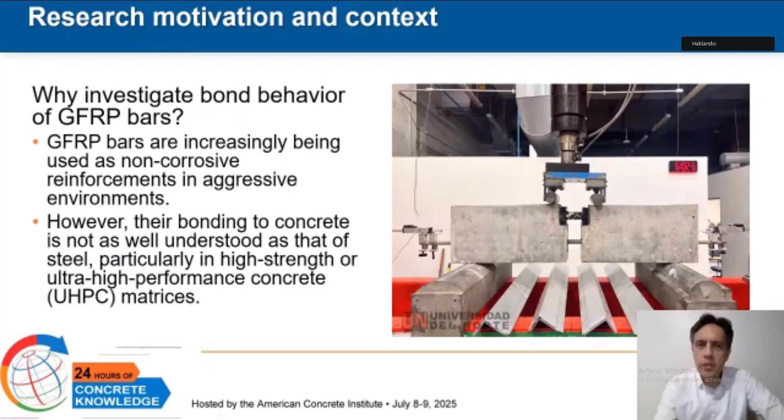The use of GFRP bars has expanded rapidly, especially in marine environments, on bridges, and at desalination facilities due to their excellent corrosion resistance. However, their interaction with concrete, especially the development of bond strength, remains unclear, particularly with high-strength concrete.

Most existing tests, such as pull-out methods, fail to capture the actual stress present in flexural members. Additionally, current codes offer little guidance on using advanced concrete such as ultra-high performance concrete, UHPC. To address these gaps, we employ the RILEM RC5 beam test method, adapted specifically for GFRP bars. This method offers a more accurate representation of structural behavior under service conditions. This methodological refinement paves the way for evaluating the influence of compressive strength on bond and its implications for future design criteria.

This side-by-side comparison shows that although steel bars are ductile and widely accepted in code-based design, they suffer from corrosion and conductivity issues, especially in tough environments. GFRP bars, on the other hand, offer outstanding corrosion resistance and are non-conductive, making them ideal for specific applications. However, their low stiffness and brittle behavior introduce unique challenges. These differences make bond performance crucial, particularly when designing with high-strength or ultra-high performance concretes.

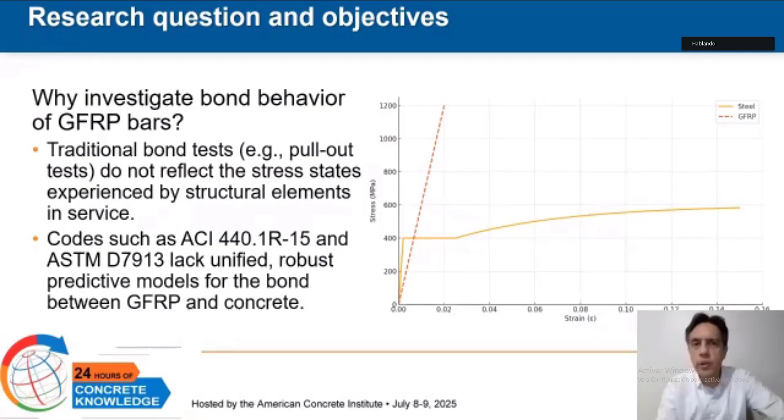This figure compares the typical stress-strain behavior of steel and GFRP reinforcements. The GFRP curve on the right exhibits a linear elastic response up to failure with no yielding, resulting in a brittle rupture around 1200 megapascals. This behavior is governed by its lower modulus of elasticity of about 60 gigapascals and the absence of plastic deformation. In contrast, the steel curve shows a well-defined yield plateau beginning at a strain of 0.002, followed by strain hardening beyond 0.025. This ductile behavior allows for energy dissipation and is central to traditional design approaches.

We then tested each of these mixtures using the RILEM RC5 hinged beam method, which provides a more realistic simulation of service conditions than traditional pull-out tests. We analyzed bond-slip curves to evaluate maximum bond strength, stiffness, and post-peak behavior.

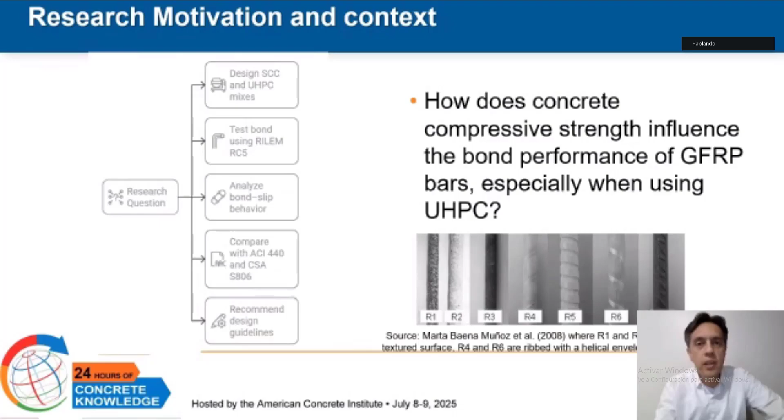Then we compared these results to the code-based predictions from ACI 440 and CSA S806 to evaluate the accuracy and conservatism of current design models. Finally, we translated our findings into practical design recommendations useful for structural applications involving GFRP reinforcement in high-performance concretes.

The bond between GFRP bars and concrete is traditionally tested using the ASTM D7913 pull-out method. Although this setup is standardized and widely used, it creates stress conditions that differ from those in real structural elements, typically applying a uniform axial pull to the bar and failing to account for flexural behavior, cracking patterns, or confinement effects.

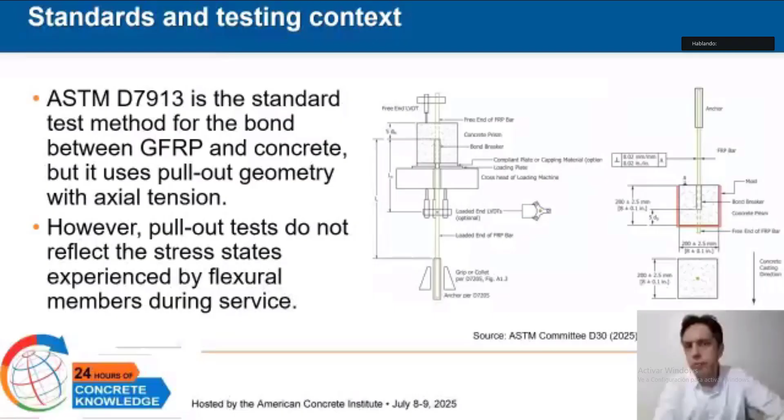To address these limitations, our study adopted the Rilem RC5 hinged beam test method, which was originally developed for steel rebars but was adapted for GFRP in this study. This configuration induces a pure bending moment, producing a bond-slip response under more realistic conditions.

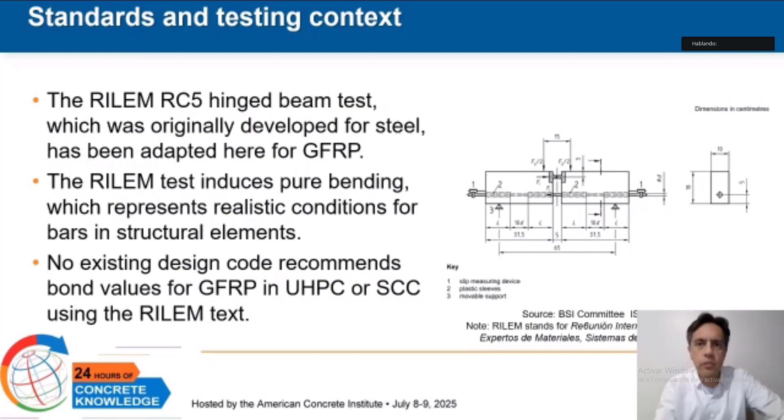This diagram illustrates the configuration of the Rilem RC5 hinged beam test, which was adopted for our study to evaluate the bond behavior between GFRP bars and concrete. The specimen is a 65-centimeter-long prismatic beam supported at both ends by movable supports that allow rotation and simulate flexural action.

The GFRP bar is embedded along the beam's axis. However, the central region, spanning over 10 times the bar's diameter on each side, is intentionally debonded using plastic sleeves. This localizes bond activation in the central bonded zone. A central point load, Fa, is applied to create a pure bending moment at midspan, generating tension in the bar and bond stresses that more closely resemble real structural conditions than pull-out tests do.

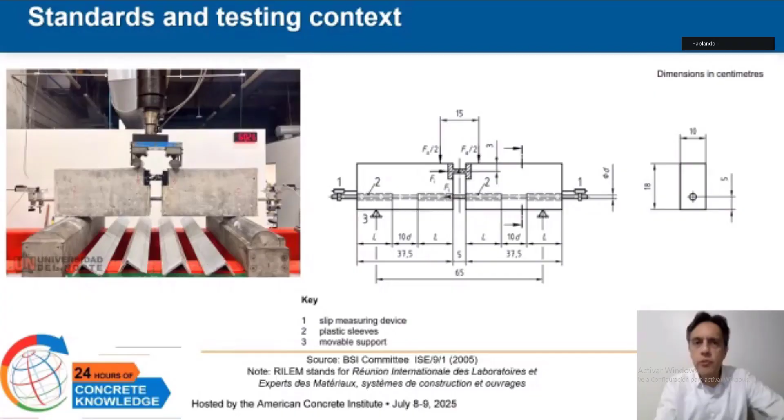Slip is measured at the bar ends using LVDTs, and failure is typically governed by bond strength or pull-out from the bonded region. This configuration enables us to capture the bond-slip relationship, peak bond stress, and post-peak behavior more accurately.

The experimental program included 4 concrete mixtures covering a wide range of strengths, from conventional self-consolidating concrete (SCC) with a compressive strength of 20 megapascals to ultra-high performance concrete with a compressive strength exceeding 120 megapascals. The goal was to isolate the effect of concrete strength on the bond with GFRP bars while keeping all other parameters constant.

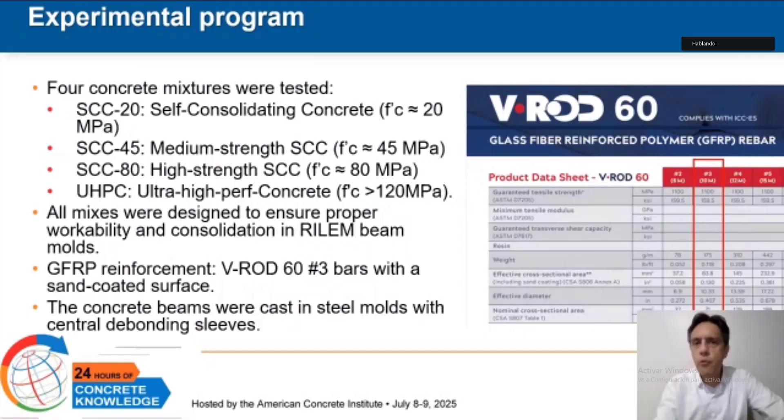We used sand-coated V-ROD 60 number 3 bars for the reinforcement, which are widely used in corrosive environments. All beams were cast using steel molds with plastic sleeves installed to define the bond region following the Rilem RC5 geometry. These carefully controlled conditions ensured consistency across specimens and reliable comparison of results.

This table summarizes the mix designs used in the experimental campaign. 3 self-consolidating concrete mixtures with increasing compressive strengths of approximately 20, 45, and 80 megapascals were produced through progressive reduction in the water-to-cement ratio and adjustments in fine aggregate content.

A 4th mix corresponds to ultra-high performance concrete and was designed with a water-to-binder ratio of 0.18, a high cementitious content, and the addition of silica fume, fly ash, and 2 types of steel fibers. Notably, the UHPC mix eliminates coarse aggregate, relying instead on particle packing and fiber reinforcement to ensure mechanical performance and matrix densification. All mixes were proportioned by mass per cubic meter to ensure proper casting in Rilem beam molds.

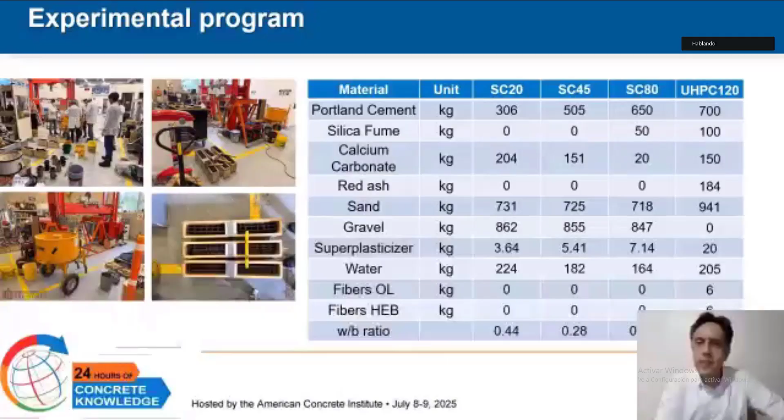These images illustrate important aspects of preparing specimens for bond tests. The first photo shows the wooden molds used to cast the Rilem RC5 beams. The GFRP bars are placed longitudinally with plastic sleeves in the central zone to create unbonded regions and ensure bond activation only within the designated embedment length.

The second image shows the steel reinforcement cage used to simulate confinement. It contains 6.4 and 8.5 mm diameter rebars placed strategically to replicate the presence of transverse reinforcement and the shear effects observed in real structural elements.

The third image displays the expanded polystyrene inserts used to form the central hinge. This feature ensures a clean fracture plane and consistent bending behavior during testing. All specimens follow this setup to maintain experimental consistency and simulate service-like stress conditions.

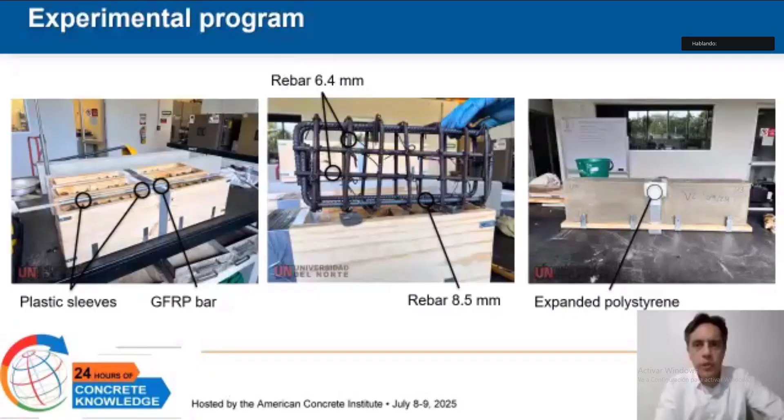This slide illustrates the control mixing sequence for both SCC and UHPC mixtures. First, we introduce all cementitious materials, including cement, silica fume, and mineral additives. These materials were dry mixed to ensure homogeneity. Next, we gradually added the mixing water and the high-range water reducing admixture. This stage starts hydration and enhances the dispersion of fine particles.

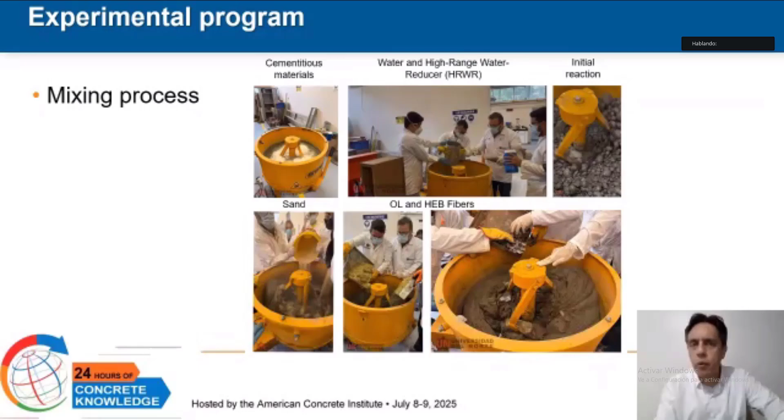As shown in the third image, an initial reaction is triggered at this stage, resulting in visible clumping due to the interaction between the silica fume and the water. Then we added the sand in increments to ensure uniform distribution without overloading the mixer. Finally, we slowly incorporated the steel fibers into the fresh matrix to minimize agglomeration and maintain workability. This standardized procedure was essential for achieving consistent rheology and strength across all batches, particularly for the ultra-high performance mix.

This slide summarizes the casting and curing process for the RILEM beams and cylindrical specimens used to evaluate compressive strength. The first sequence shows the casting phase in which fresh concrete is placed into the beam molds and standard cylinders. Proper vibration and surface finishing were used to eliminate voids and achieve uniform consolidation.

The second sequence shows the curing process. All specimens were stored under controlled humidity and temperature conditions for 28 days under ASTM C192 guidelines. This step was critical to ensuring the development of full mechanical properties, especially for the UHPC mix.

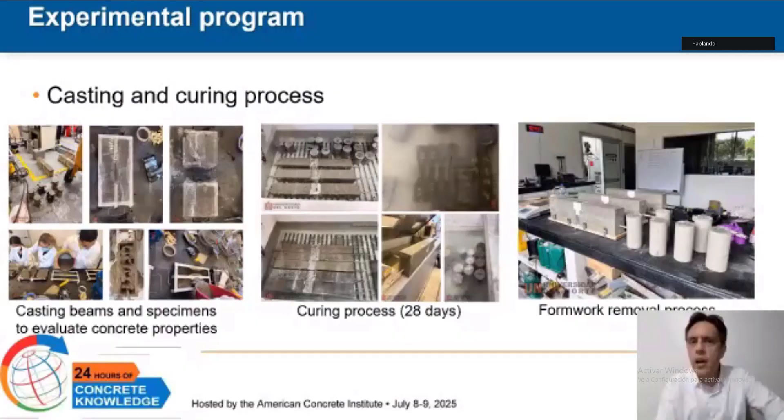After the curing period, the formwork was removed. The beams and cylinders were then demolded and prepared for subsequent testing, including bond strength and compressive strength assessments. This entire protocol was strictly followed to maintain consistency and reproducibility across all concrete batches.

This table summarizes the compressive strength results obtained from standard cylinder specimens tested at 28 days for each concrete mix. The target strength, known as design FC, ranged from 20 megapascals for the lowest strength self-consolidating concrete mix to 120 megapascals for the ultra-high performance concrete mix.

In general, all mixtures met or exceeded their design strength targets. For instance, SC20 achieved an average strength of 18.65 megapascals, which is within acceptable variation for low-strength self-consolidating concretes.

The SC45 and SC80 mixes achieved average strengths of 46.69 megapascals and 79.22 megapascals respectively, indicating good consistency and alignment with mixed design expectations. The UHPC mix reached an average strength of 122.72 megapascals with minimal dispersion across specimens, highlighting the effectiveness of matrix densification and fiber reinforcement.

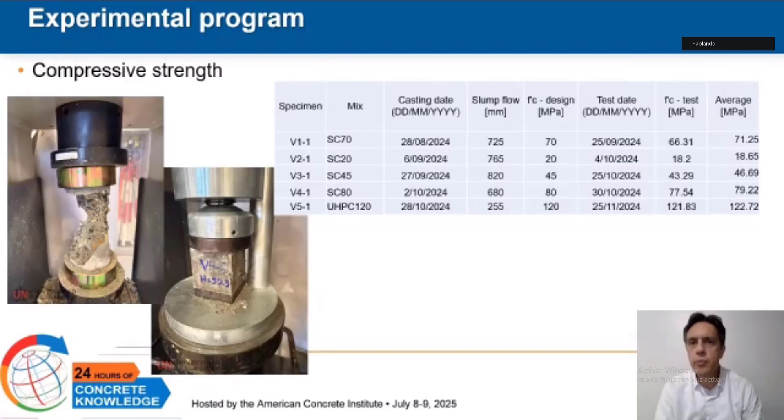This result confirmed the reliability of the casting and curing process and validated the use of these mixtures for the bond testing program. They also provide a reference framework for interpreting the bond behavior observed in each mix type.

This slide illustrates the full setup of the RILEM RC5 hinged beam test, which is used to evaluate the bond behavior of GFRP bars embedded in concrete. On the left side is the specimen geometry: two symmetrical concrete beams labeled A beam and B beam, joined by a central steel hinge.

During casting, a block of expanded polystyrene was temporarily inserted to create the hinge void. After curing, the placeholder was removed and replaced with a steel hinge, which allows for free rotation and induces a pure bending moment at mid-span.

A single GFRP bar runs continuously through both beams and is partially bonded over a defined length, and the bond region is carefully controlled using plastic sleeves that isolate the bonded segment.

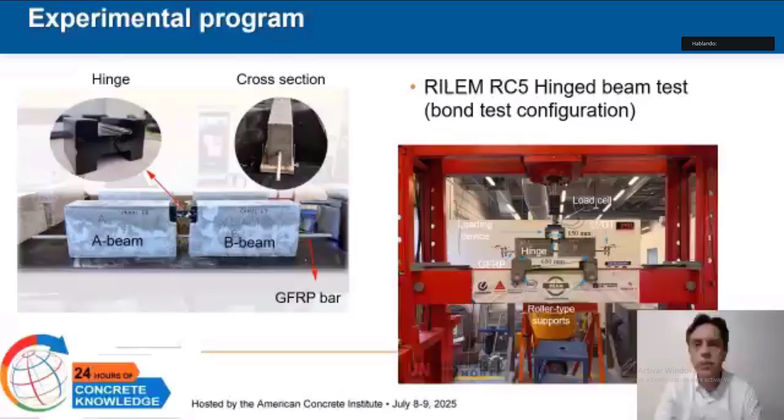On the right is the complete test setup in the universal testing machine. The specimen rests on roller-type supports that allow longitudinal movement and ensure a true hinge condition. A loading head connected to a calibrated load cell applies the load vertically at the hinge, enabling precise force measurement. This configuration produces a well-defined bond stress state that simulates real structural conditions more effectively than conventional axial pull-out tests.

This slide presents the visual results of the bond strength tests conducted on GFRP reinforced specimens using the RILEM RC5 configuration, alongside the formulas used to calculate the bond stress.

On the left of each pair, we observed the unloaded, undamaged beams in the testing frame. On the right, we see the condition of the same specimen after failure, revealing the distinct failure mechanisms associated with each mix. In the top row, the SC20 mix, a low-strength self-consolidating concrete, exhibited progressive bond slip with surface cracking.

And limited concrete crushing. The middle row shows the SC45 mix. Here the failure became more localized, with sharper cracking along the bond and some separation between the beam halves.

The bottom row corresponds to the UHPC 120 specimens. These showed a markedly different behavior, a brittle failure mode, dominated by interface debonding with almost no surface damage, a result of the high matrix stiffness and densification.

Although the SC80 mix is not shown, it presented an intermediate behavior, with moderate cracking and improved bond capacity relative to SC45, but not as abrupt as in UHPC.

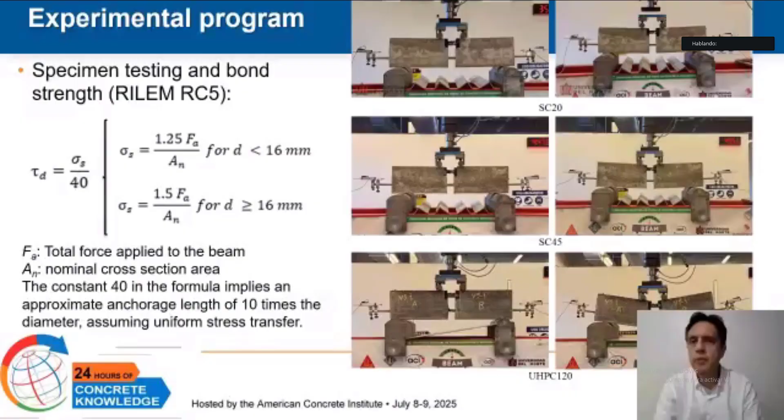Altogether, this comparison highlights how both material properties and structural configuration govern the bond performance of GFRP bars in high-performance concretes under bending conditions.

This slide compares two common approaches to estimating the bond strength of GFRP bars: the ACI 440.1 equation and the CSA S806 equation. Both approaches are derived from pull-out test data and estimate bond strength based on concrete strength and bar geometry. The ACI approach is more empirical, whereas the CSA model incorporates adjustment factors for bar location, concrete type, and surface condition.

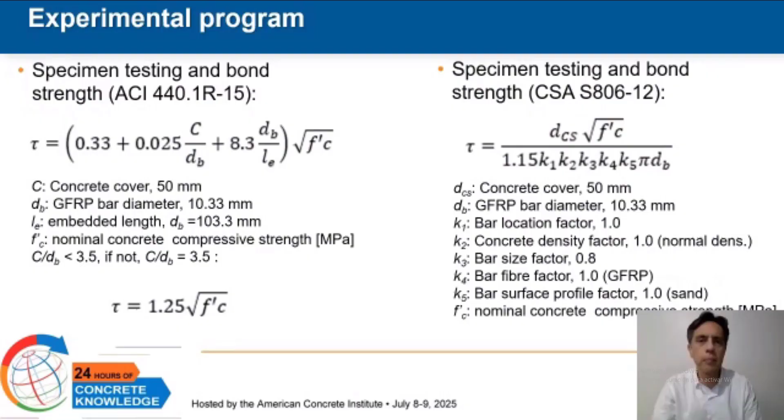However, as our experimental results show, both methods tend to underestimate the actual bond strength measured by the RILEM RC5 hinged beam test, especially with high-performance concretes such as UHPC. This underscores a critical limitation: standardized pull-out tests do not replicate the flexural stress conditions experienced by real structural members. By contrast, the RILEM method provides a more realistic and often higher estimate of bond performance, which may be essential when designing with advanced concretes and GFRP reinforcement.

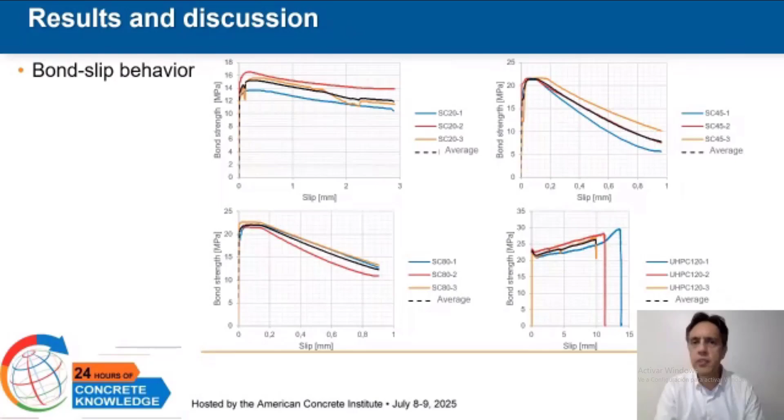For example, in UHPC, RILEM testing measured 23.04 megapascals, while ACI predicted only 13.82 megapascals. This underestimation is consistent across all mixtures and highlights the limitations of existing standards when applied to high-performance concretes or when bond is mobilized under flexural stress states.

The results suggest that RILEM RC5 provides a more realistic assessment of in-service bond performance, especially for design cases involving UHPC or advanced self-consolidating concrete mixtures. Therefore, for accurate anchoring design and reliable development length estimations in GFRP reinforced members, project-specific testing or revised code provisions may be necessary.

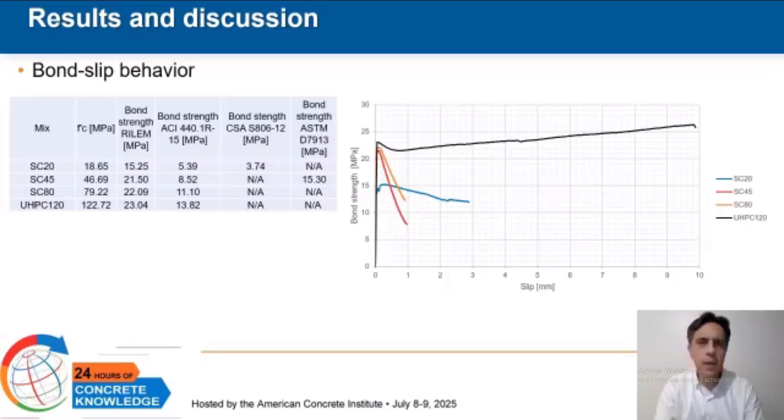This table and graph summarize the average compressive, bond and slip strengths of each concrete mix tested under the RILEM RC5 configuration. As expected, there is a strong correlation between compressive and bond strengths. The SC20 mix produced a bond strength of 15.25 megapascals with a measured strength of 18.65 megapascals. Bond strength increased to 21.5 megapascals in the SC45 mix, around a 41% increase compared to the SC20 mix.

This confirms the positive effect of improved matrix cohesion. Although the compressive strength of the SC80 mix nearly doubled compared to the SC45 mix, the bond strength increased only marginally, reaching 22.09 megapascals, a 2.75% increase over the previous mix. This suggests a point of diminishing returns for bond development in traditional self-consolidating concretes.

In contrast, the UHPC 120 mix achieved the highest bond strength of 26.33 megapascals, a 72.7% increase over SC20. However, this was accompanied by a significant increase in slip, reaching nearly 10 millimeters. This indicates brittle post-peak behavior. These findings emphasize that while compressive strength enhances bond capacity, matrix characteristics and failure mode, particularly in UHPC, play a critical role in how the bond is mobilized and dissipated.

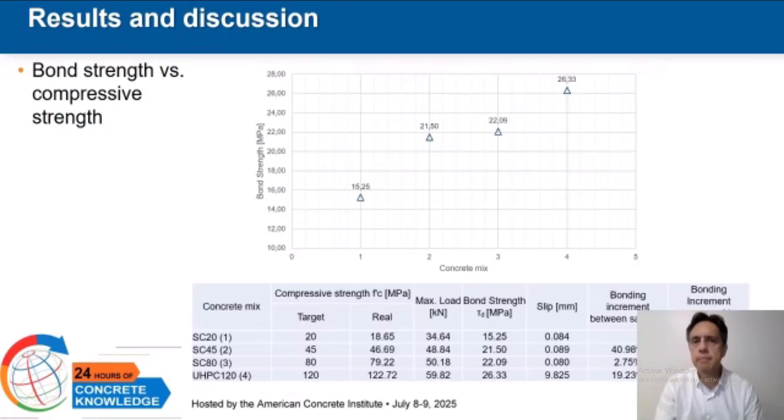In conclusion, the results of this study demonstrate that the bond behavior of GFRP is significantly impacted by the concrete matrix, particularly its compressive strength and internal structure. Although UHPC offers superior bond strength, it also exhibits brittle debonding behavior that must be considered in the design process.

The RILEM RC5 test method proved valuable for simulating realistic stress conditions, producing bond values that exceeded those predicted by ACI, CSA, and ASTM pull-out-based provisions. This discrepancy underscores the need to update or supplement current design standards, particularly when working with advanced concrete technologies.

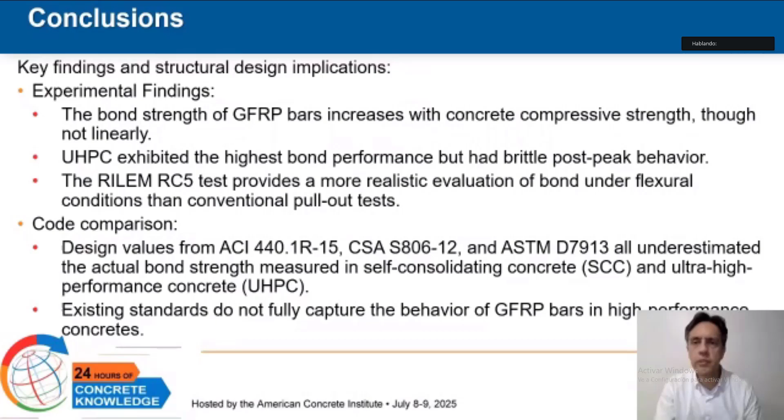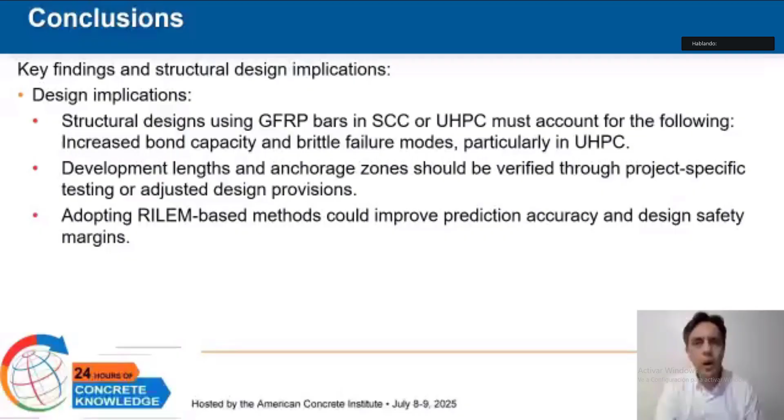For practicing engineers, this finding suggests that using RILEM-based bond models or conducting custom bond testing is essential when designing with GFRP in self-consolidating concretes or ultra-high performance concretes. Ultimately, incorporating more representative testing methods into design practices will result in safer, more efficient, and better optimized GFRP reinforced structures. That concludes the presentation.

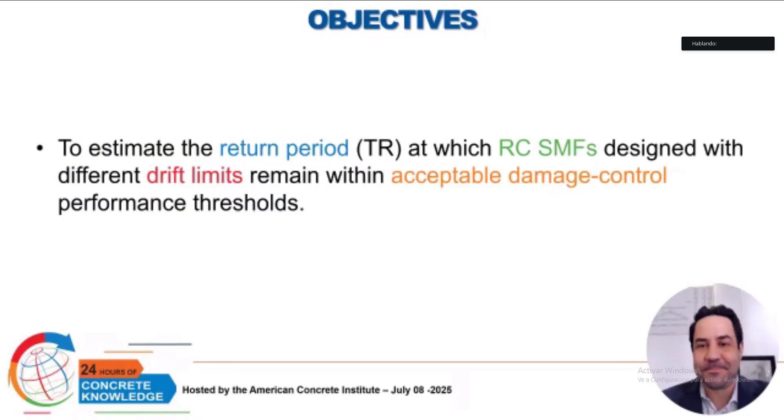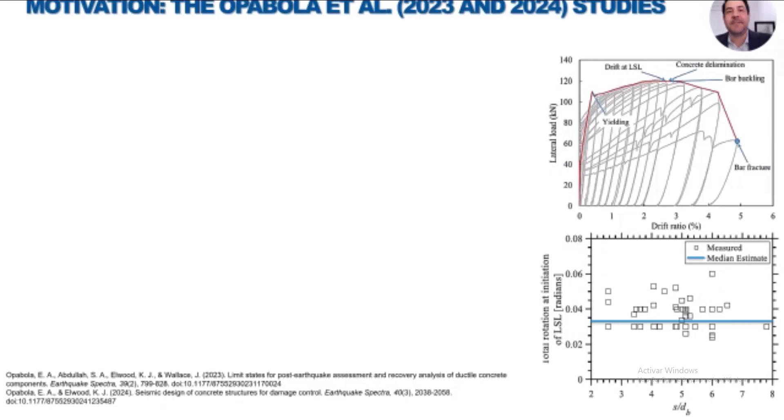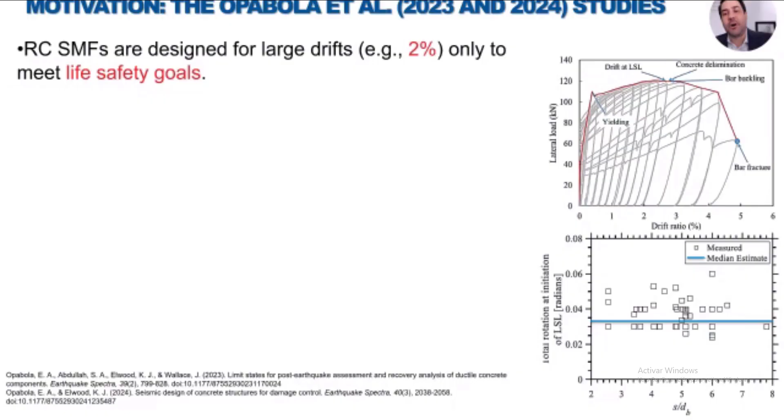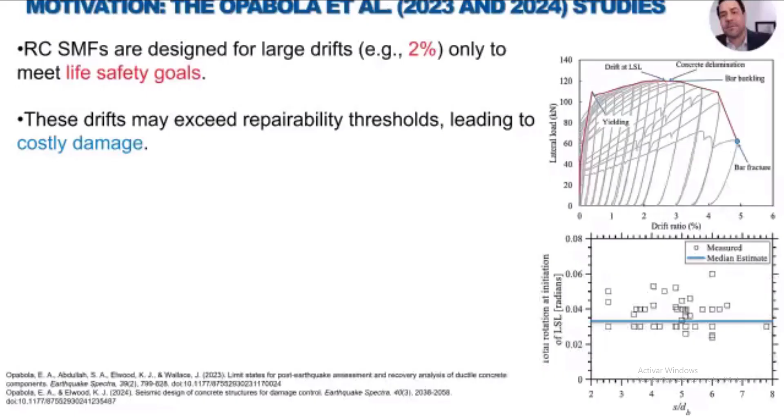As motivation, we have the recent work led by Professor Opabola about repairability limit states for ductile reinforced concrete structures. With regard to special moment frames, some key takeaways from their work is that reinforced concrete special moment frames are designed for large drifts only to meet life safety goals. These drifts may exceed repairability thresholds, leading to costly damage as observed during the Christchurch sequence in New Zealand. So when we have a reinforced concrete moment frame undergoing lateral shaking, we expect that the beam ends and column ends go through plastic deformation, so we can define the beam rotation beyond repairability as the onset of lateral strength loss, for example, when the onset of bar buckling is observed.

For ductile reinforced concrete beams, the median LSL rotation is about 3.6%, so for this study we set a 2% rotation limit to cap the probability of exceeding LSL at 20%.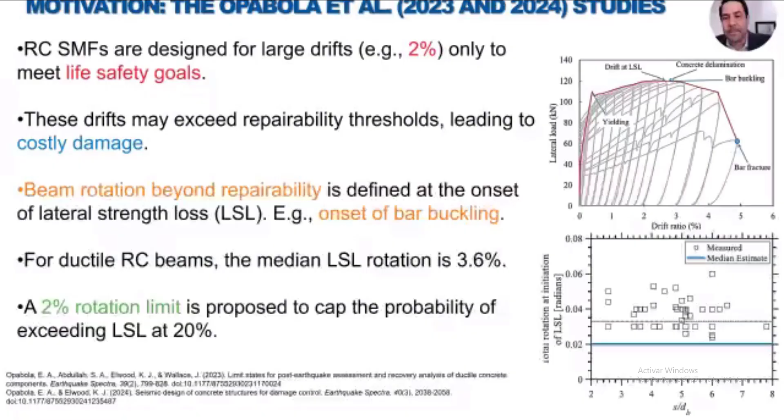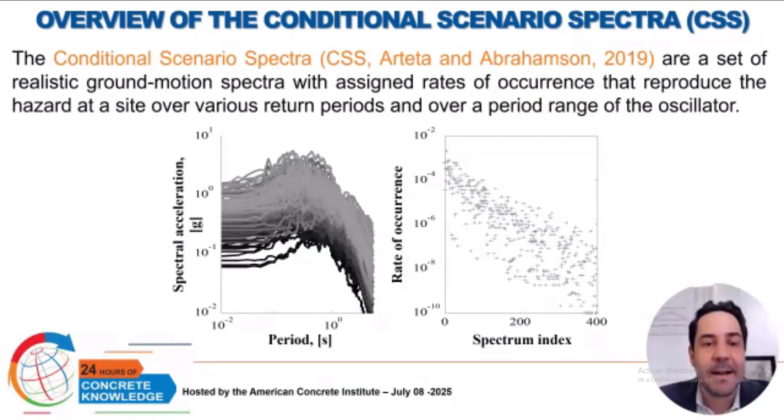To achieve our goal of estimating the return period of EDPs in a building, we need to select a ground motion selection technique. In this case, we select the conditional scenario spectra, which is a hazard-consistent ground motion selection technique that picks realistic ground motion spectra with the correct spectral shape for different intensity levels, allowing it to reproduce the hazard at a site over different return periods and different oscillator periods.

This is an example of how the ground motion selection looks for return periods from 500 to 4,000 years. On the left-hand side, you can see the scenarios that went into the selection.

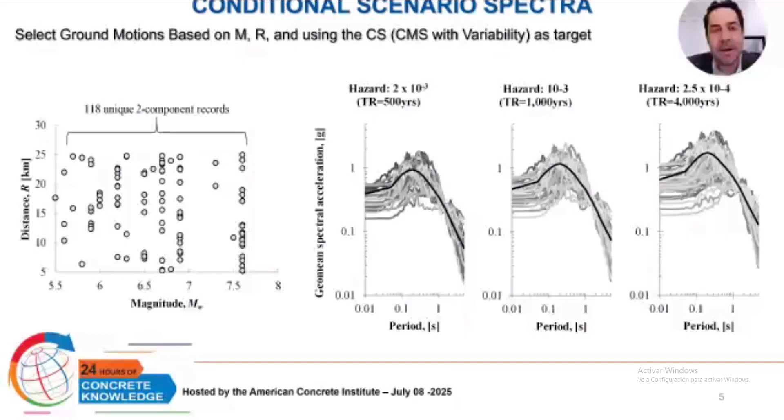The main idea of the CSS is that we can assign the rates of occurrence of each one of these ground motions to the EDPs. Here we are showing how the ground motion set, which comprises about 300 ground motions, is able to recover the hazard at a site. In this case we are talking about Treasure Island in the Bay Area of San Francisco.

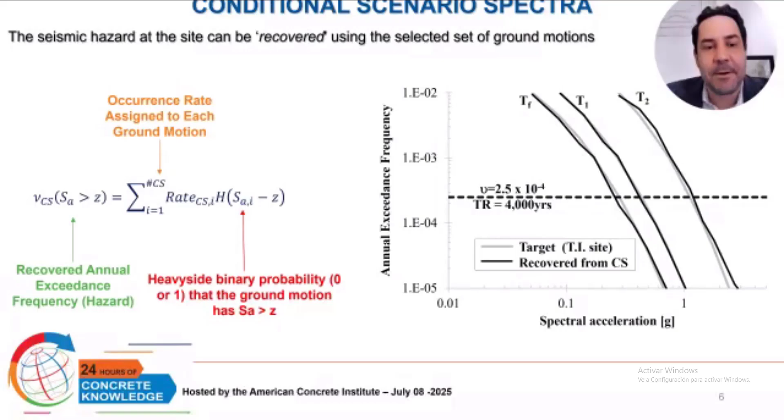With the CSS rates of occurrence, the EDP risk can be estimated to understand when an EDP level matters or is of concern. The EDP risk curves relate EDP levels to their corresponding return period. For example, in the right-hand figure, the return period of the 1% roof drift ratio of a reinforced concrete frame is 2,800 years, which may be rare enough as not to be of concern, but that depends on the risk we want to accept as a society.

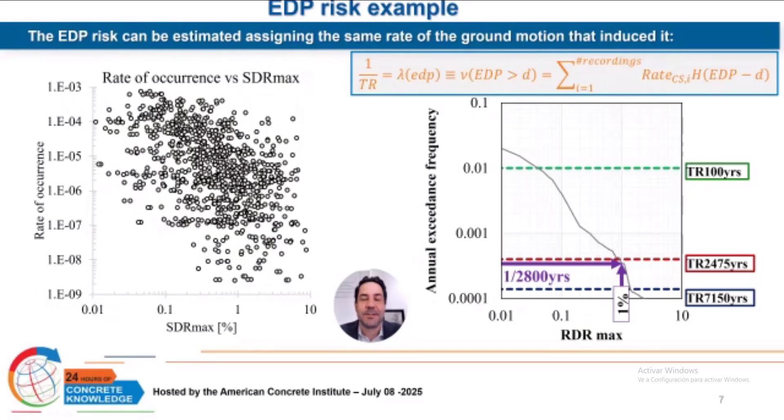Here we have the Treasure Island site location. It is important to mention that the frames we are about to analyze were designed according to ACI 318-19 for special moment frames, considering loading from ASCE.

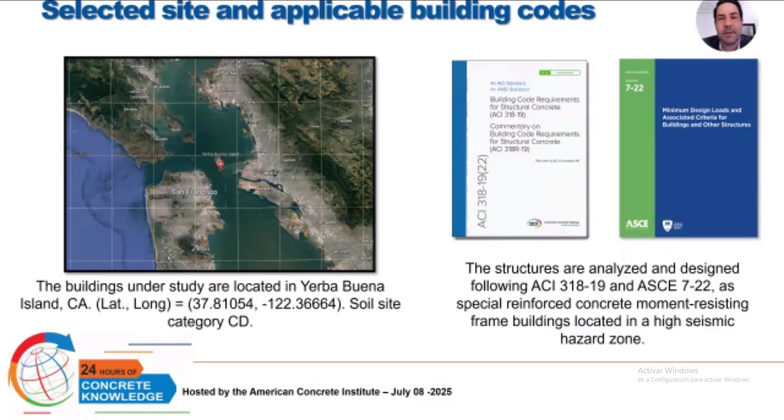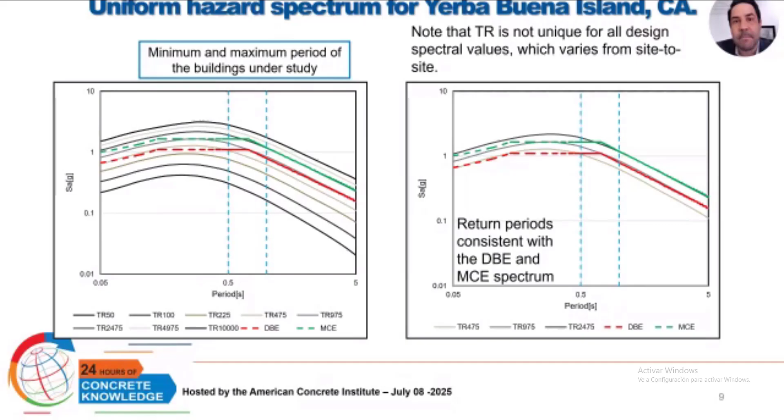2022. Here we present a contrast of the DBE and MCE ground motion levels versus the discretization of the hazard as represented by UHS. This is important because for different periods of the structures, the MCE and DBE levels have different return periods, which are gathered from this type of figure.

For the conception, and the linear and nonlinear dynamic analysis, we utilize the platform RCFIAP developed here at Universidad del Norte. RCFIAP is able to conceive and design a frame according to code and automatically create a nonlinear model of the building.

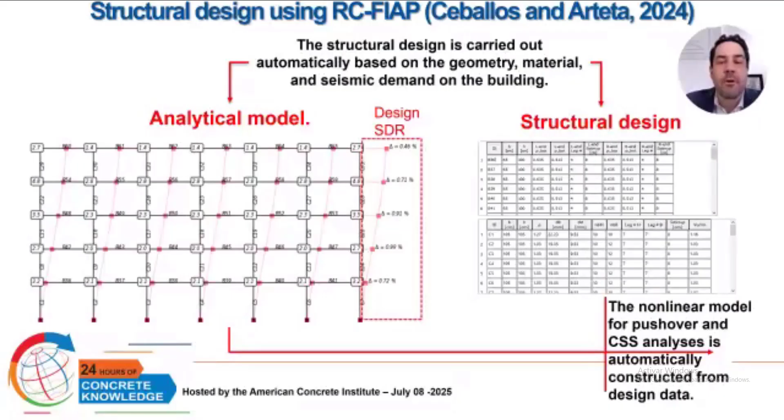Two types of analysis were performed on the study frames. One was pushover analysis, where we can see the plausible collapse mechanisms, noting that they were dominated by a beam mechanism, which is of interest for this particular investigation.

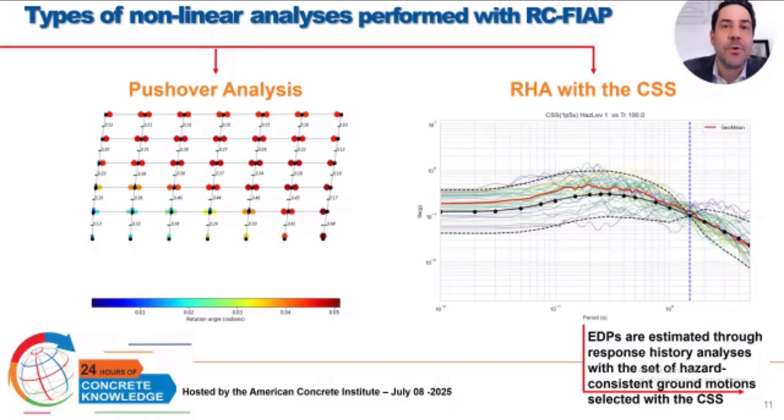We were also able to perform several nonlinear dynamic analyses to gather EDP versus rate pairs, allowing us to construct the risk curves of two EDPs of interest: the story drift ratio, and the maximum beam end rotations.

This second EDP is of main interest because we claim that a building is well behaved if the beam rotations are not large enough to surpass the 2% drift or rotation limit that we defined previously in this investigation.

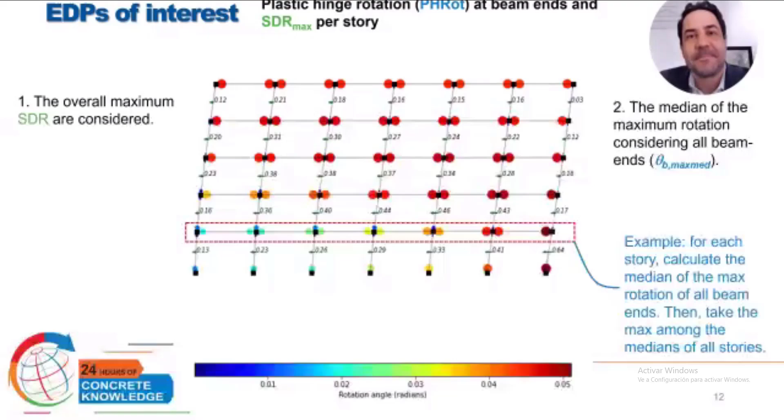So here we have the first example. This is a 6-story frame, and this number goes down to about 1,000 years for the building designed for a 2% story drift ratio limit. In any case, the return periods are above DBE, which might be satisfactory or not, depending on the risk level that the owner wants to accept.

In all cases, except for the stiffer building, these return periods are below MCE.

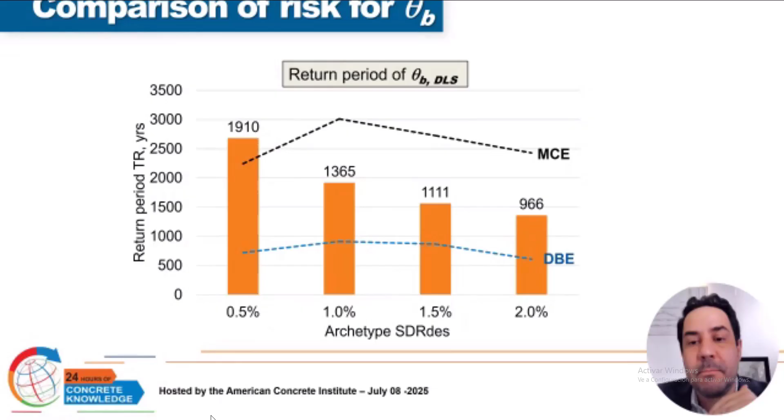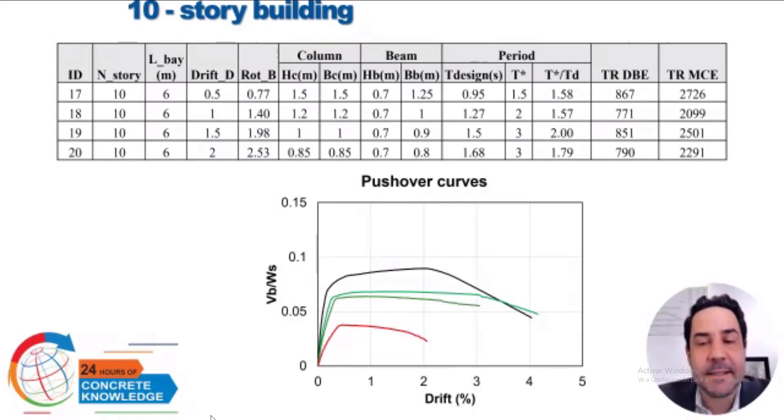Next, let's move on to the 10-story building. As you can imagine, the columns and beams become more robust if we want to impose those story drift limits for design. Below you have again the pushover curves of the buildings under analysis, and here we show how the return period of the 2.5% drift demand behaves.

We can see that the response follows a similar trend to the behavior of the 6-story frame, but now the return periods are closer to DBE, meaning that if we go below DBE, it becomes more likely that the 2.5% story drift ratio will be observed in the building.

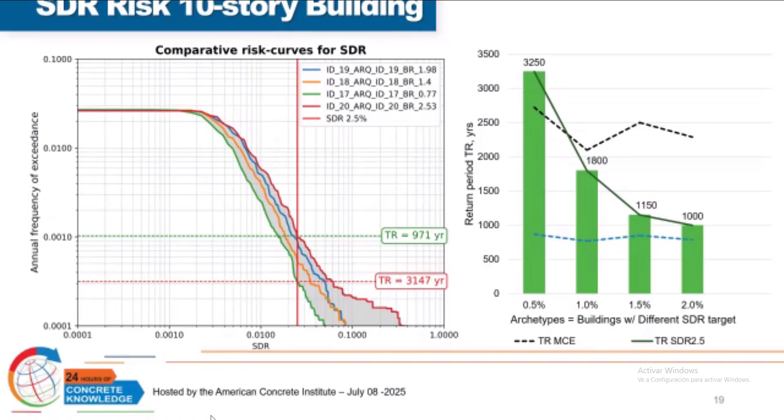When we compare both frames in terms of beam rotation, or the rotation beyond reparability, we see that they follow the same trend, but the 10-story building designed for the 2% story drift ratio limit achieves or exceeds the reparability limit close to DBE.

As shown in this presentation, the analysis under the CSS, a hazard-consistent ground motion selection technique, allows us to ask different questions from the traditional manner of response analysis. Now we can answer when it matters, and we see that these two particular frames seem to be safe independently from the story drift limit imposed during design. But the buildings designed for 1.5% and 2% behave almost similarly, and you really need to stiffen the building a lot to change the return period beyond reparability.

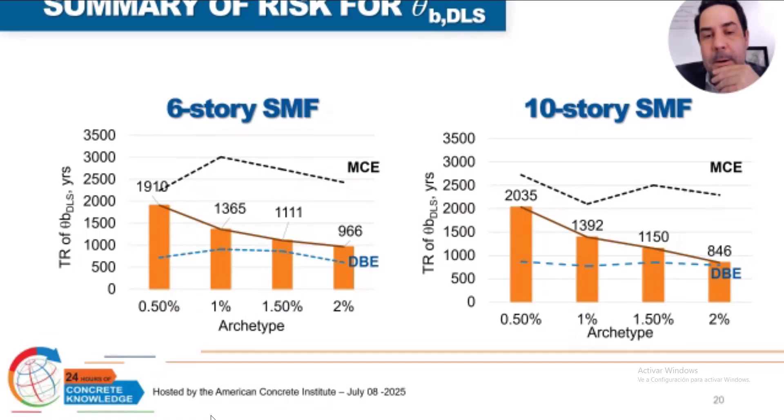The conclusions of this work are that the design story drift ratio significantly impacts the return period of the maximum beam rotation. The risk of both frames is comparable, as shown in the last figure. For example, the beam rotation beyond reparability is about 1100 years for the frame with a 1.5% drift limit for design, while it goes down to about 850 years for the frame designed with a 2% story drift ratio as limit. Importantly, what we learned is that the return period of the EDP, in contrast to the DBE and MCE levels, must be assessed on a case-to-case basis, as it is a period-dependent problem.

So thank you very much, and I hope you enjoyed this talk.

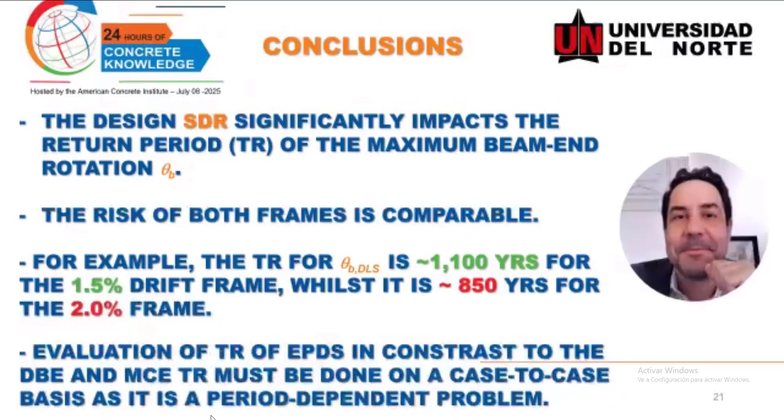Well, thank you to Dr. Arteta for his great presentation. I think it's an ongoing study, as he explained, but with very promising results of understanding the behavior of these buildings. I don't see many questions on this regard, Bernie. I don't know if you have any particular ones from other attendees. Well, let me see what I have here. I have, it looks like I might have one.

The question says: both the 6 and 10-story RC moment frames in your study showed return periods for 0.5% SDR exceeding the MCE level. Given that these are moment frames, do you think excessive initial stiffness contributed to this? And beyond over-design costs, could such stiffness also reduce ductility or hinder effective energy dissipation during larger seismic events?

This is a very good question. As academics usually do, we come up with some designs. In this case, the 0.5% story drift ratio building, if you check the size of the members, they are 1400 millimeters by 1400 millimeters, which might be prohibitive in terms of cost. Importantly, to answer the question, we are checking the building at relatively low story drift ratios, in this case at 2%. So we are not pushing them up to collapse to see if the concern of the viewer is materialized. At this point, we stop very early, at about 2% story drift ratio. So definitely larger members will have lower rotation capacity, indeed less ductility, but this is not part of the study.